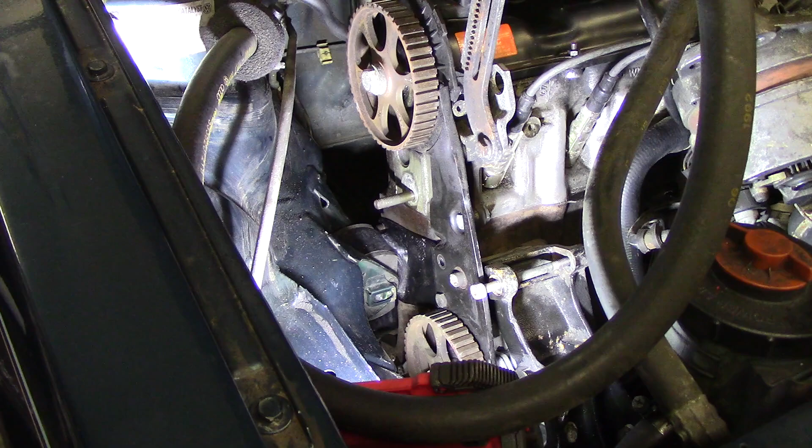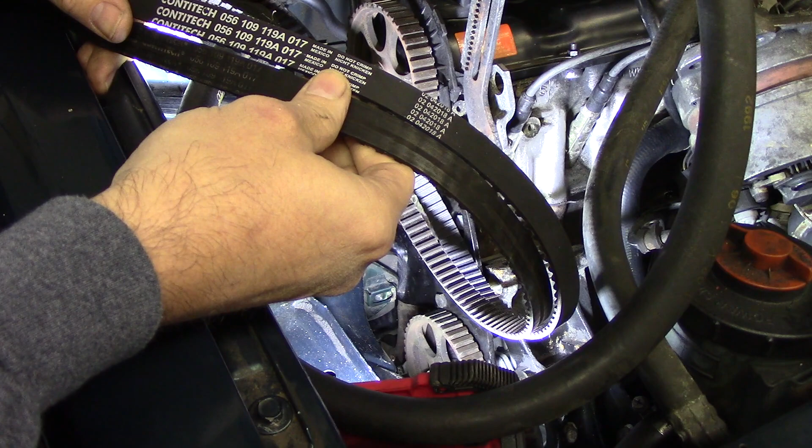I'm not sure how well this will show up, but anyway, got the timing belt ready to put it on. It's always a good idea to make sure it's the same. I seem to remember a situation where there was a certain car where one engine had a belt that was one tooth longer than another, and it caused a lot of havoc, at least in the ordering process.

But these appear to be exactly the same manufacturer, everything. This one doesn't look bad, but that thing has got to be old. It was cheap too. Now for timing marks on these cars, show you what we have.

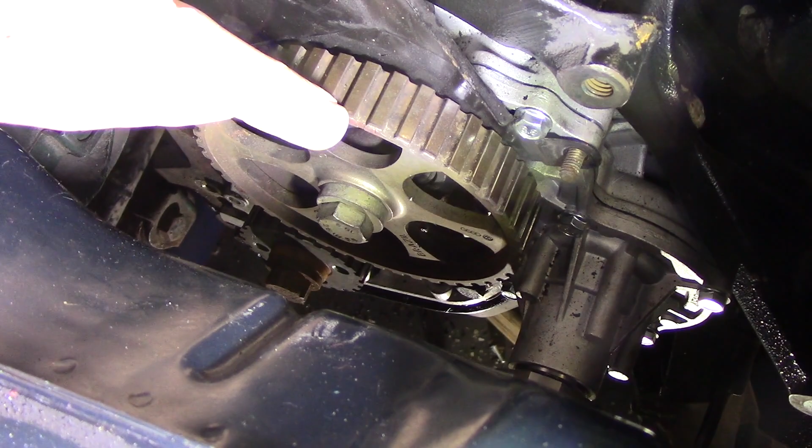The cam has an OT and an arrow, an OT. The countershaft sprocket is exactly the same part. It also has an OT on it. That is not what you want to line up with, because you won't hurt anything, you just probably won't run. This shaft drives the oil pump and the distributor.

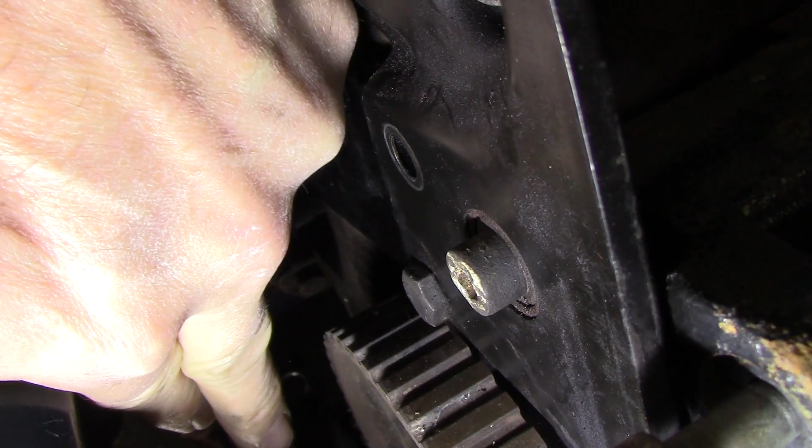There is actually a dot down here on this sprocket. If you can see it, it's right there, and that will line up with the pulley. It goes on the crank right here. I'll show you this when we put it together. There's a little nub that locates that pulley, and you line up a little groove right there with the dot on the pulley, and that gets everything straight.

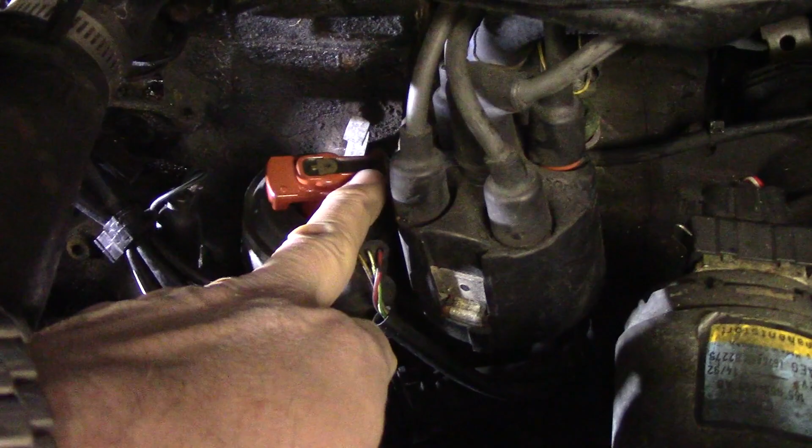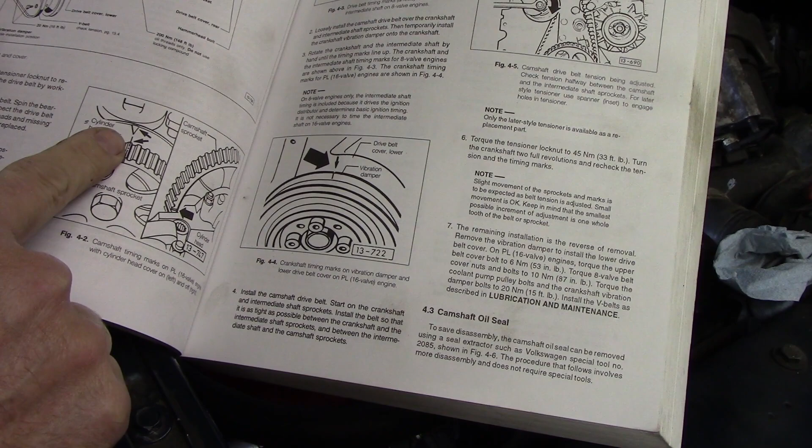Plus, this car has a distributor, so you line that up with the number 1 spark plug wire and you should be right. I actually found the book, so I have a graphical representation of what we're talking about. So there's the cam. This is what I was talking about. That's the crank pulley, and that's the countershaft pulley.

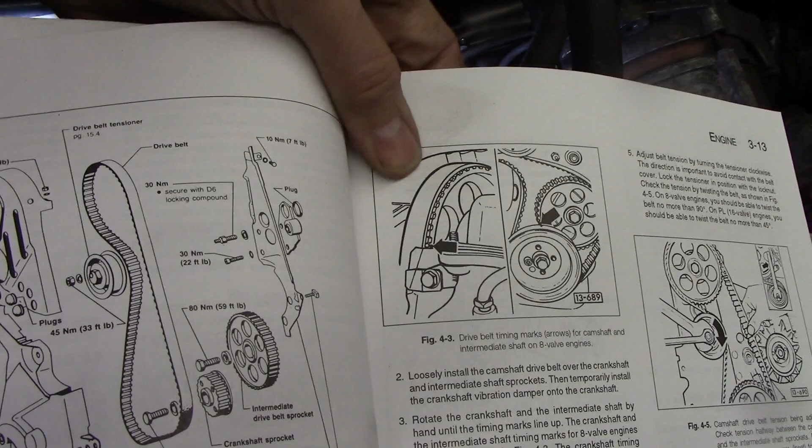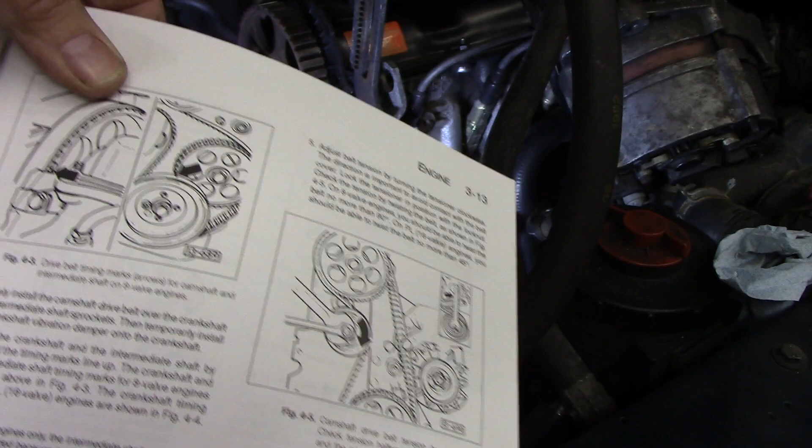And on the older cars, this timing cover was all metal, and so it encapsulated everything, so it didn't have the back piece like this car does, and there was a groove in the back, and you'd line that up with the head. So anyway, let's start putting this belt on. Everything should be lined up. Slide it over such as that. And of course it always jumps, but in general, that's what we'll do.

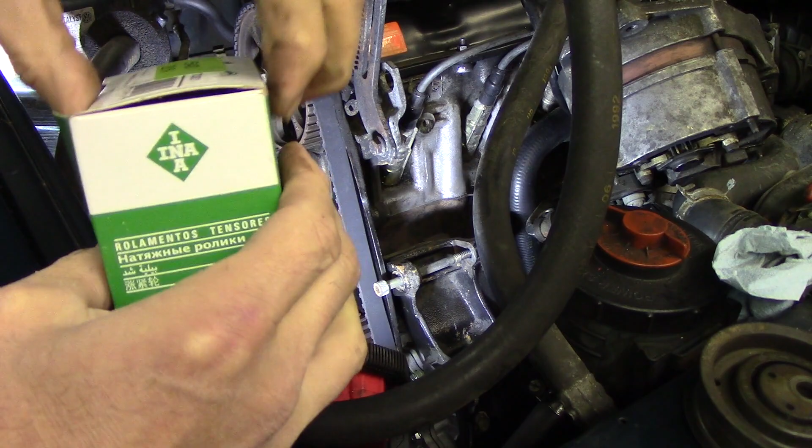And then we will take the new idler for the timing belt. And it's a good thing I ordered one. This is the old one. It looks fine, but if you listen to it, it doesn't sound too good. Plus there's a little bit of play in it. There's a new one. It's exactly the same, and it does not have that play.

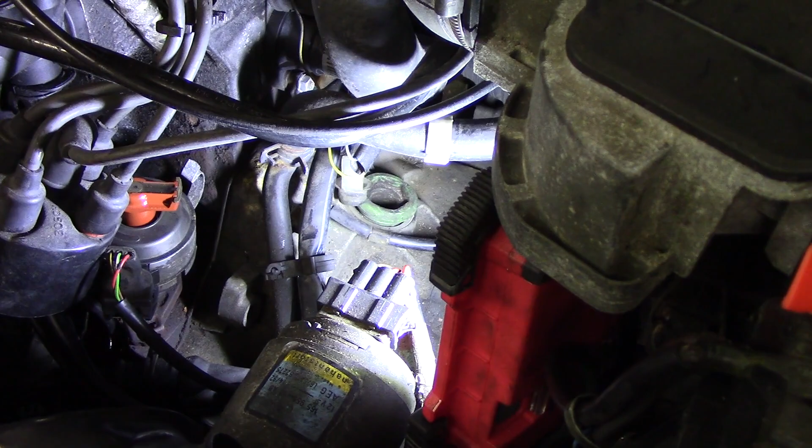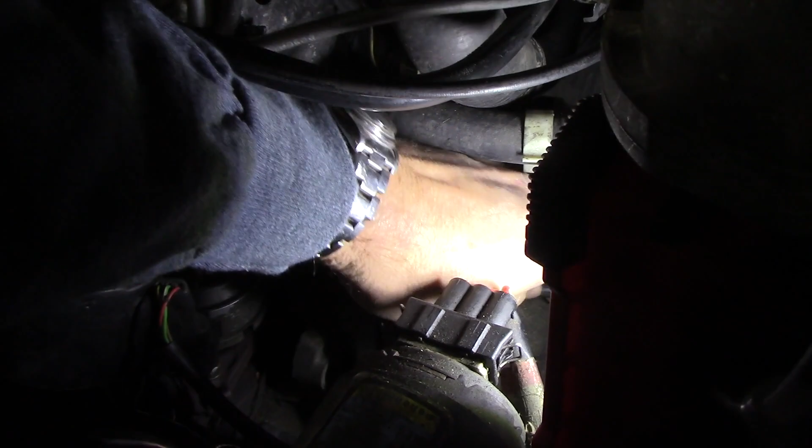Actually, there's one more thing I want to show you. Let me get set up and we'll show how to check the timing mark, because the good timing mark for the crankshaft is on the flywheel. So the true timing mark on the crankshaft is here in the bell housing on the flywheel through that hole. It actually has a little plastic plug that pops into there. But you can't see the mark. That's for a special VW tool that you can set the timing with.

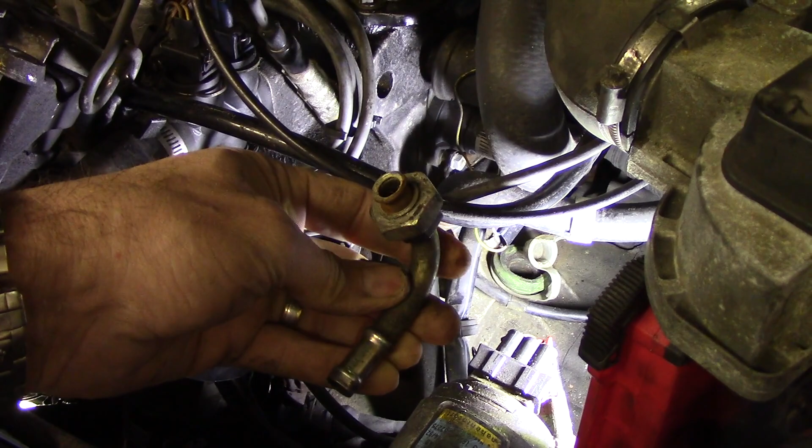So you need a 27mm hex to get there. I remember making one when I was a mechanic out of, I think this is a Mercedes-Benz transmission fitting, I don't know. Anyway, I was able to make one out of this thing. A 19mm nut screws on there, and you can get it out with that. I never put them in very tight, so you could get them out by hand, but this one is tight for some reason.

And I did hear a horror story one time of a customer that added oil to the car, and they added oil through that. So you pretty much want to put that thing back in there. So let me get that out and I'll show you where the timing mark is.

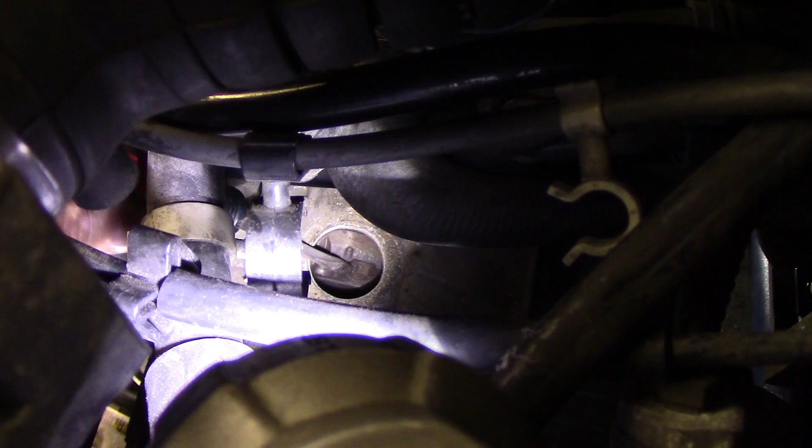Okay, it's down through that hole. This is the flywheel. There's an arrow. I don't know if we can get the right angle to see it, but there's an arrow right in the middle of the hole. That lines up with the timing mark. That mark is for ignition timing, I'm pretty sure. This other mark, that should be our top dead center. But we can also line it up on the other end of the engine. We just have to put the cover back on and line up that groove in the front pulley.

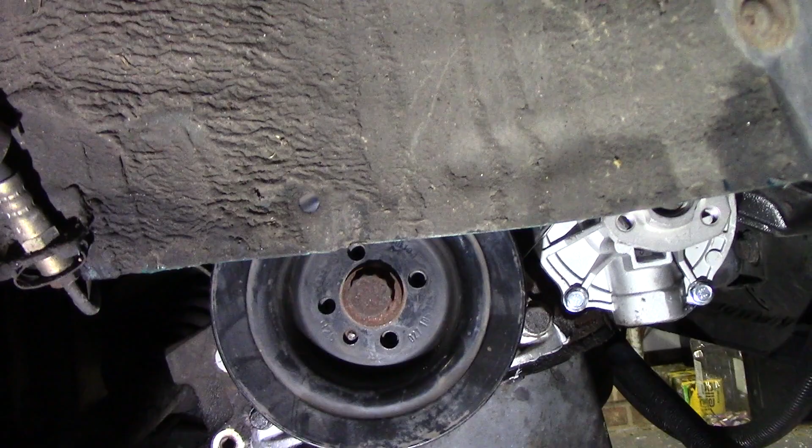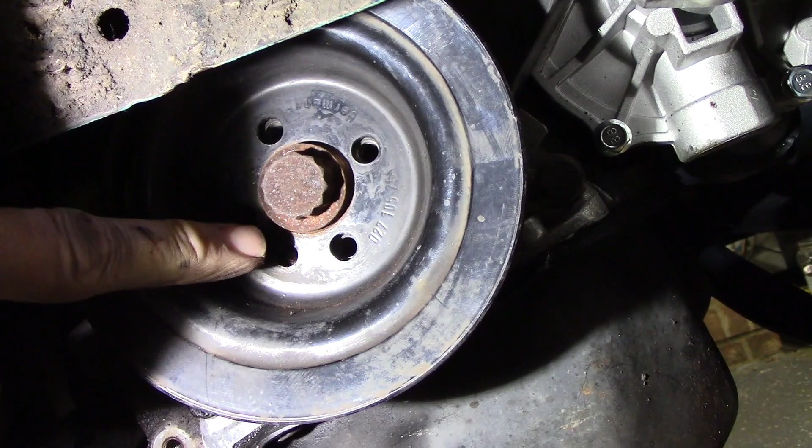I have slipped the crank pulley back on. There's a little nub on that timing pulley that lines up with this hole, and that is what aligns it. Up here, if you can see it, there is an OT mark and a groove in the pulley, and that's what sets it. So we're good on that part. Okay, let's get this thing on here. Everything's lined up. Let me pull the crank pulley back off.

We will set the timing in this car with the timing light afterwards, so if the pulley that drives the distributor gets off, it's not a biggie. Our teeth are lined up there. Keep it tight on that side. Roll it around, and then we will slip the tensioner pulley on. If I remember right, yeah, we'll go over the edge.

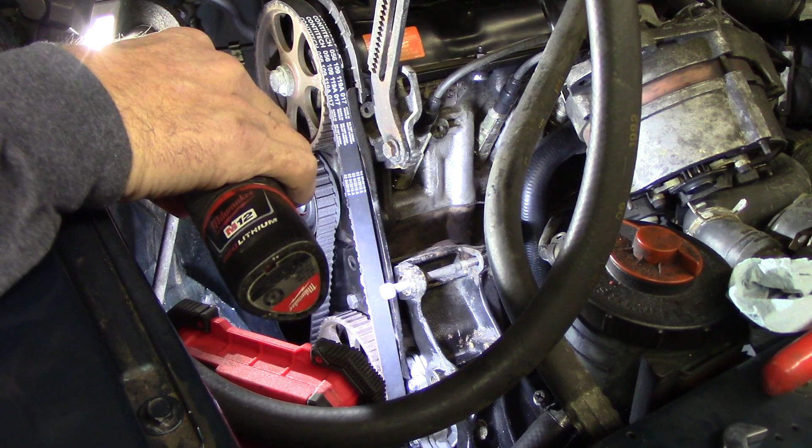And we will go and recheck our timing marks, and then I'll rotate it. Make sure they line back up. That one looks good. We can go ahead and, actually, let me go over here and look. Make sure the flywheel didn't turn. That looks pretty good. Slide the crank pulley back on. Check the cam mark.

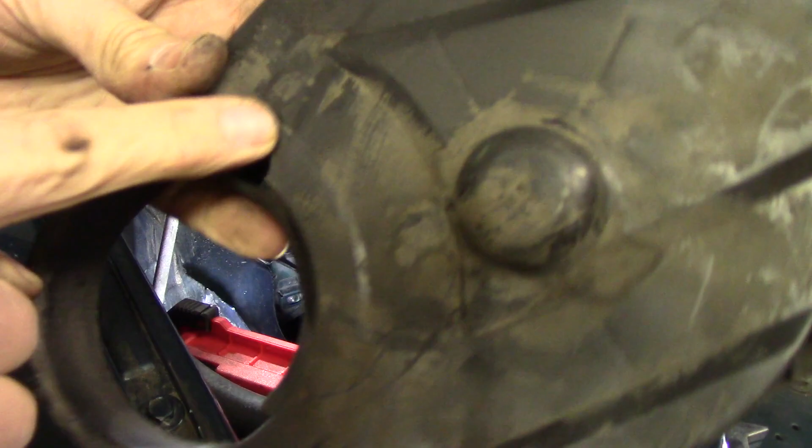On these cars, it's so tight you can't see it. The A2 cars didn't have this side motor mount, so you had a little better access over here. To me, that looks good enough. As I said, we'll check the timing anyway. We can go ahead and stick the cover on and make sure that lines up. There's the groove and there's the mark. So we will go ahead and rotate the engine around.

All right, the notch is lined up. Let me just turn this back to the little dot on the flywheel. That little gurgle you heard wasn't me, that was coolant in the tank. I've been adding coolant to make sure I didn't have any leaks. Everything looks good. We are not a tooth off, or we would be way off. It would not line up that well if we were a tooth off. Okay. Actually, that thing can go ahead and stay on there.

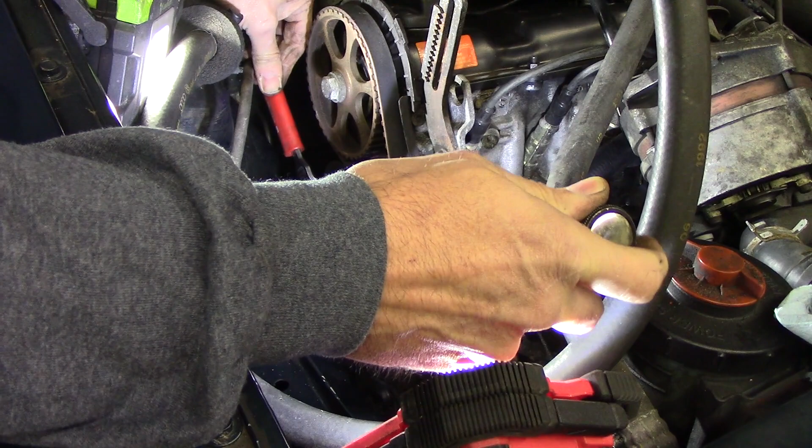And there's a torque spec for that, which I think is pretty important. So let's see what that is. 33 foot-pounds. Okay, we're set for 33. With a 15 millimeter socket. Let's hold some pressure back on the tool. All right.

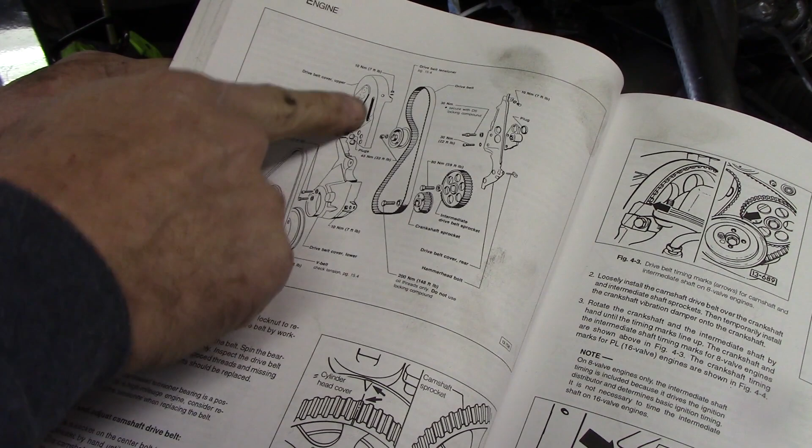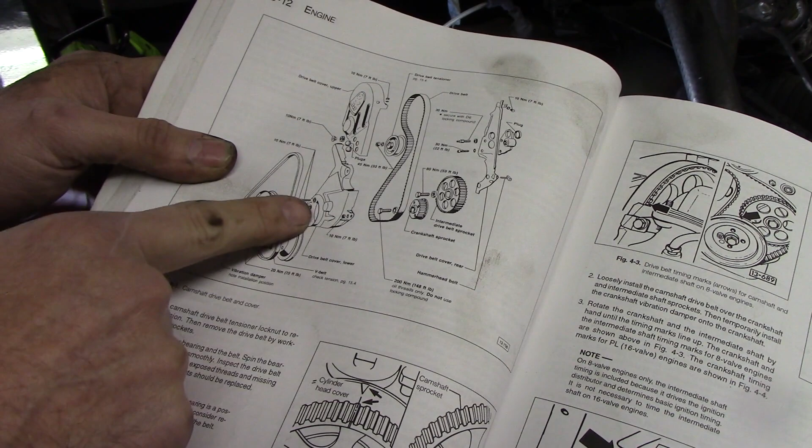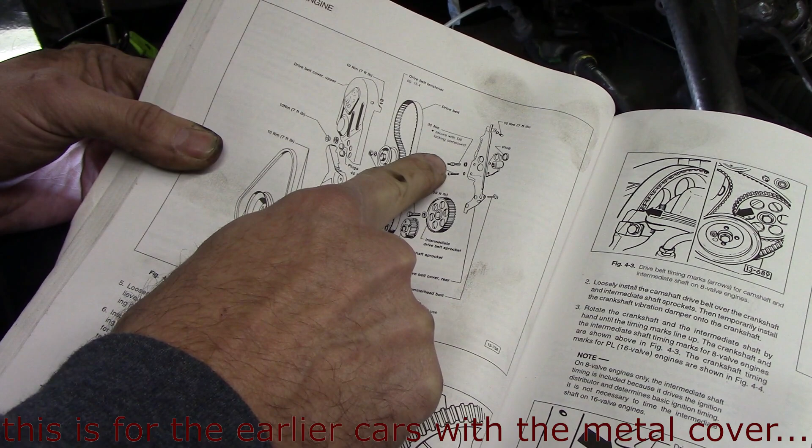So I'm not going to bore you too much. I'm going to put some of this back together, put the covers on, and we'll come back and put the accessories on. But I have those two hex bolts down there. I'll get that cover back on. But there's a bolt right here that, I'll have to look back at the footage, seems like that was not there. And it's like M8 on one end, and that holds the back cover on, and then M6 out here, and that nut goes on there and holds the front cover on. So I may have to make that and come back and put that back on, but we'll get this stuff back on.

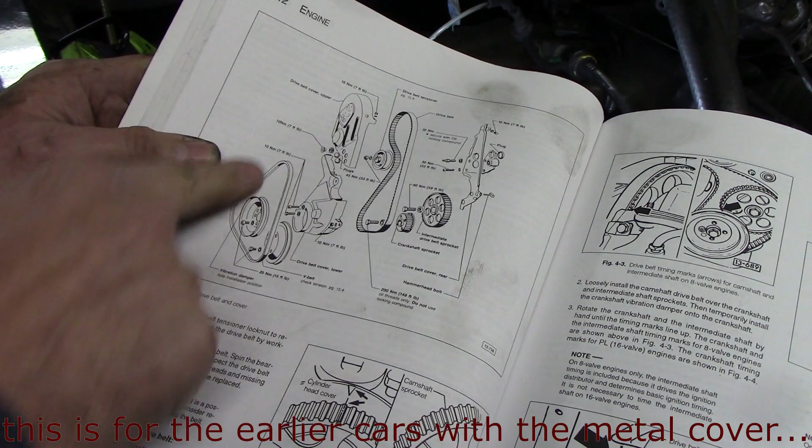Okay, so I think we're ready to put the AC compressor back in. I figure how I contorted it. There was a bolt missing on one side, and it turns out, let's see, it was on the back side. But I did find it. It was located underneath it. So let's see if we can get this thing back in here.

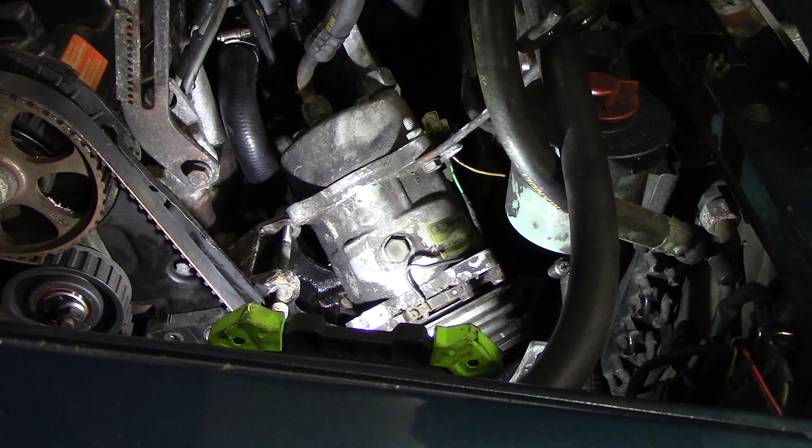So the upper radiator hose I took loose and got it out of the way. I already put some coolant back in it to make sure it didn't leak, so apparently I'm pretty full at this point. All right. So it's kind of an interference fit on here.

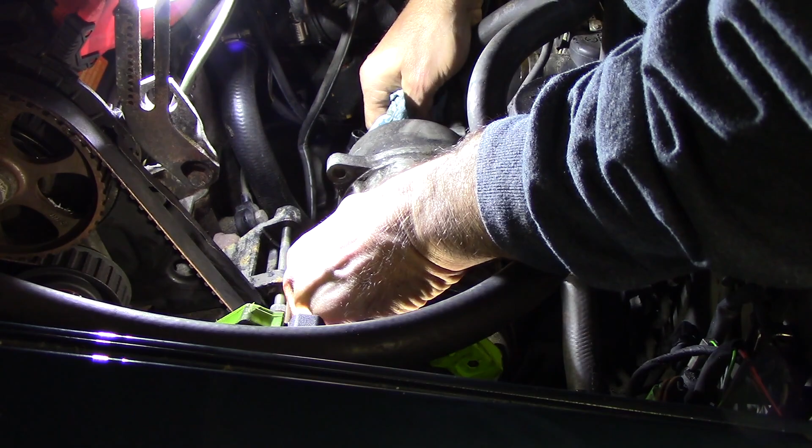Alright, it moves some. So that's like a bushing in that bracket that makes itself fit. Pulls itself up tight. I don't really know why it would have moved, but it is what it is.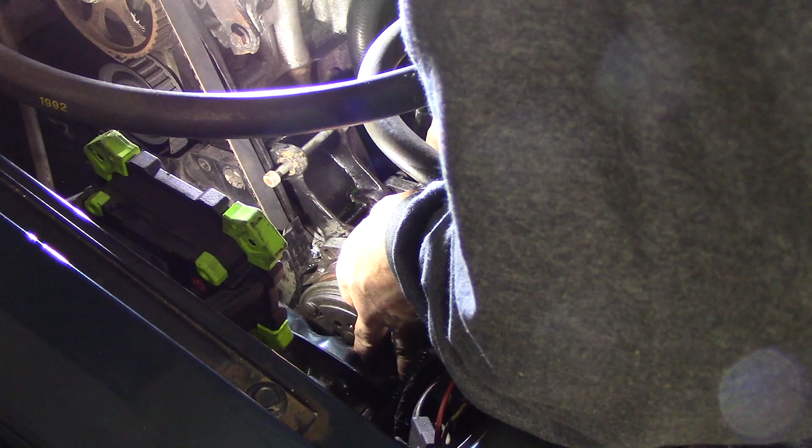Alright, now the front bolt. And then that's the back bolt from the rear that I found down underneath the bracket. Let's see if we can get these things started. I don't know what I was fighting with, and all of a sudden it decided to drop into place.

So the missing bolt down here, if you can see that, over here, I apparently bought this special flex hex socket from Mr. Snap-on years ago, just for this job. Just to reach it.

Alright, somewhere I've got a stubby 8mm I'll use. AC compressor's in there. Got the alternator wrestled in. Let's see if we can get that bolt started. That was a piece of cake compared to the AC compressor. And that hose will go there. I'm going to plug the AC compressor in. This thing will go up here.

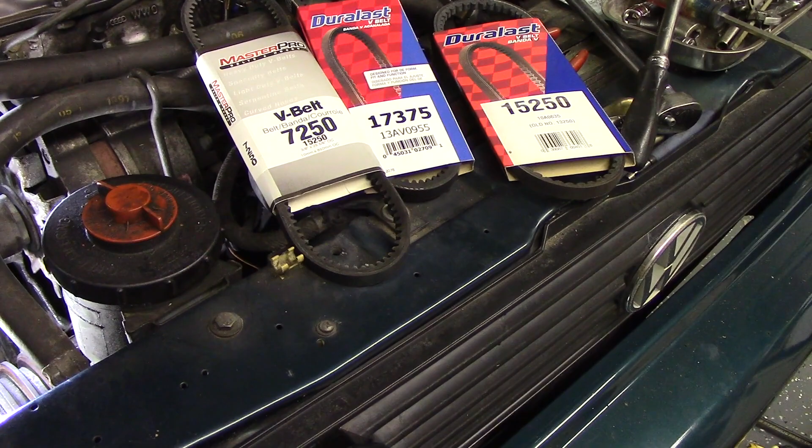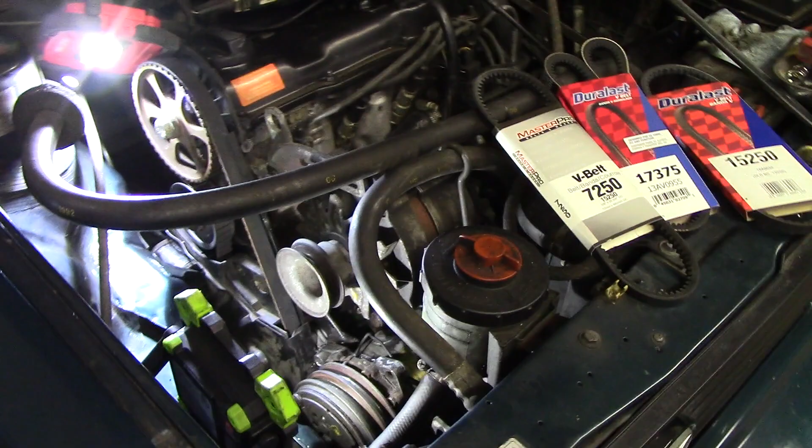Okay, we're ready to put the belts back on. I got all new ones. I had to go to 2 different stores to get them. Can you guess where I got them? Anyway, I think V-belts are becoming a thing of the past. They don't seem to stock as many. So let's go ahead, get you where you can see.

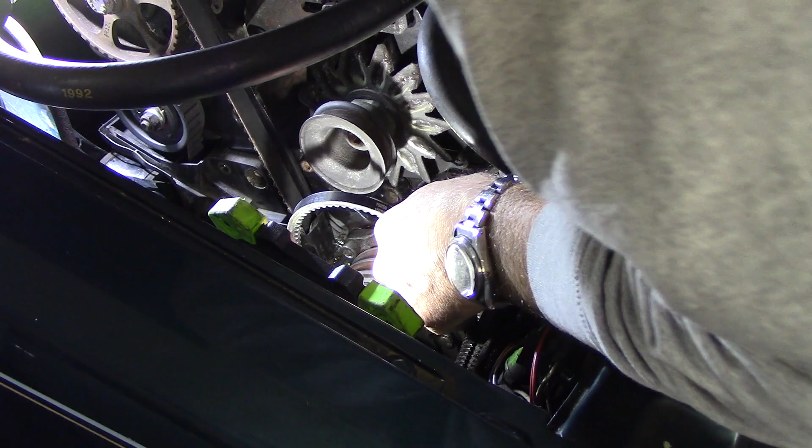Let's get these back on there. So first needs to go the alternator belt. It's driven off the AC compressor. I'm going to try to get these on here. Since everything moves, you can't really do them one at a time. So the AC compressor is too far down, so it's interfering with the water pump pulley, so I need to pull it back up. Since you really can't see this, I'll do that off camera.

Okay, so the original water pump belt, AC belt, was back on there. I got what was the replacement at AutoZone, and there was just no way it was going to fit. The pulleys were like touching, it was so tight. So I went back and got the next longer length, and it was mispackaged, and it was a 15 series, a narrower one. So anyway, I'll deal with that at some other point.

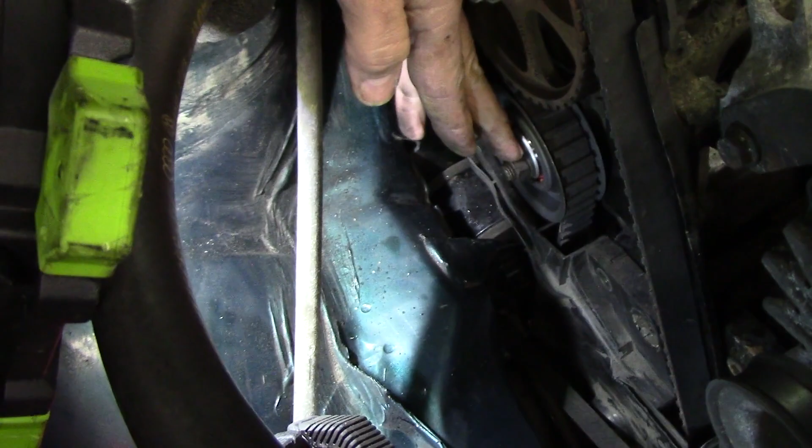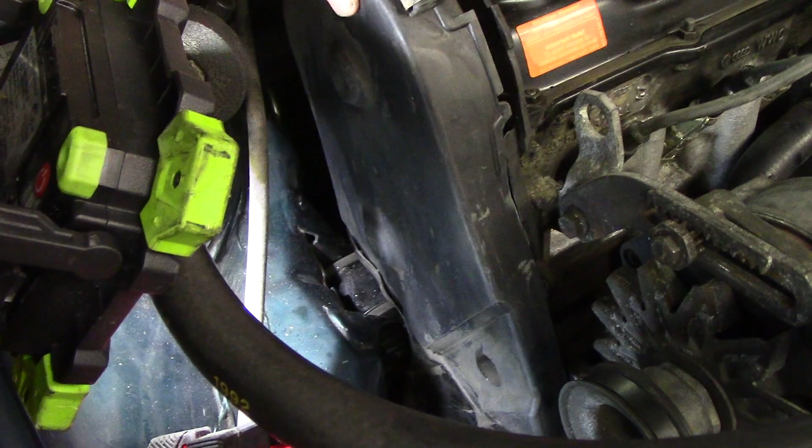I did put a new one on the alternator, got that adjusted, tightened down. I did find, hiding underneath the wrench in the magnetic parts tray, the correct lock washer for the tensioner, so I have that on there. I have not made the bolt that goes in there. I'll probably make that at work this week, and we can stick that on whenever, because this cover is just held on. Just plastic. And then it'll act like a stud, the nut will go right there.

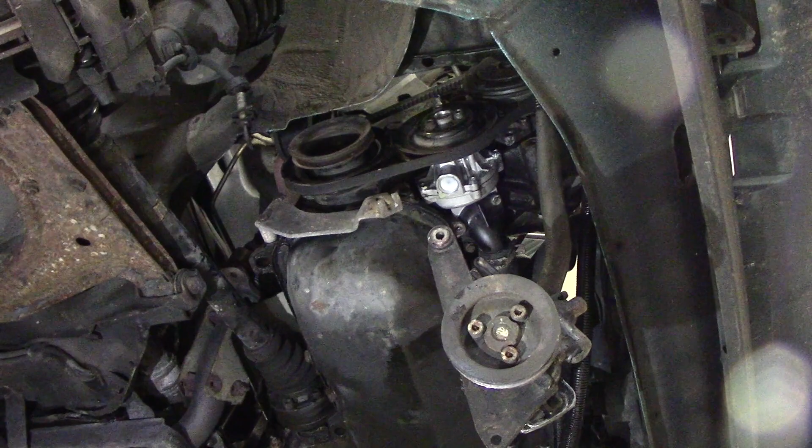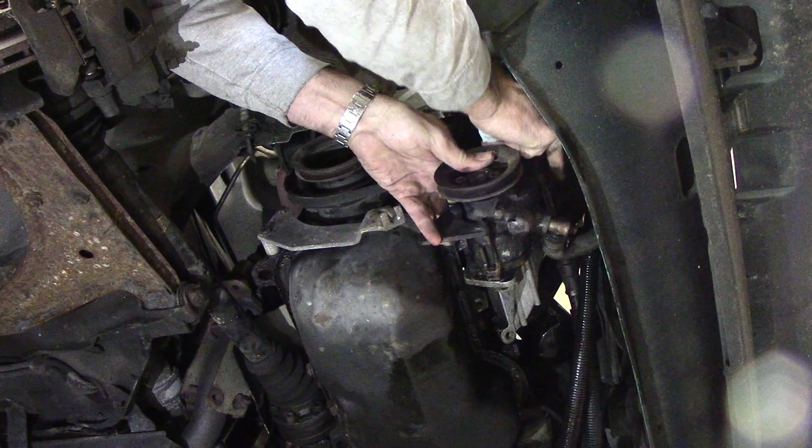So next, I will get you down below, and we will properly install the power steering pump. Hopefully not causing any water to come out of the engine this time. Let's try it from over here. I'll put the pivot bolt through first. We'll just do this by hand this time.

Not sure why this thing doesn't want to line up. I know. There it is. Actually, I remember now. There is a nut or a bolt all the way in the back behind the power steering pump, right here, up inside this cast bracket. But when I took it off, I just took the pump off. I didn't mess with loosening the belt.